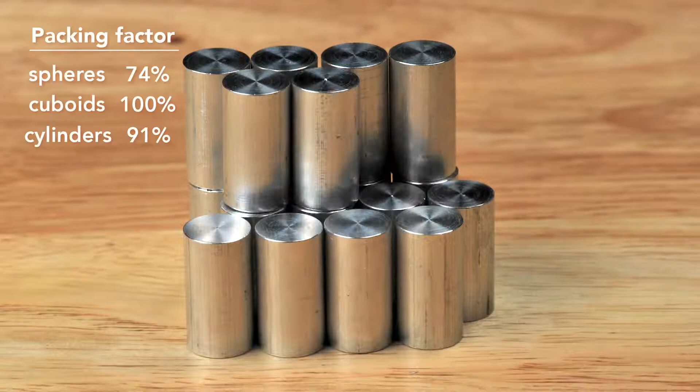So, to create a can, engineers use a cylinder, which has elements of both shapes. From the top, it's like a sphere, and from the side, it's like a cuboid. A cylinder has a maximum packing factor of about 91%, not as good as the cuboid, but better than the sphere. Most important of all, the cylinder can be rapidly manufactured.

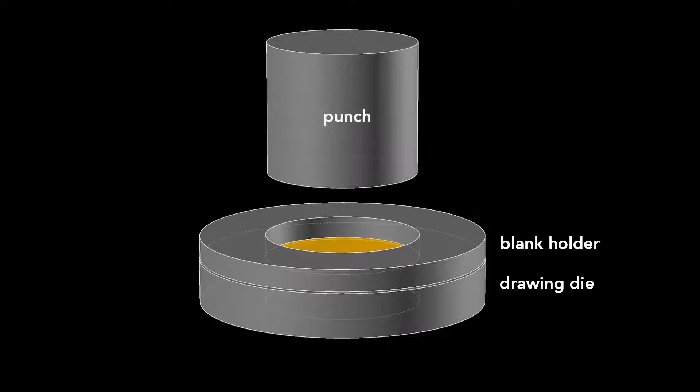The can begins as this disc called a blank, punched from an aluminum sheet about 3/10 of a millimeter thick. The first step starts with a drawing die, on which sits the blank and then a blank holder that rests on top. We'll look at a slice of the die so we can see what's happening. A cylindrical punch presses down on the die, forming the blank into a cup. This process is called drawing.

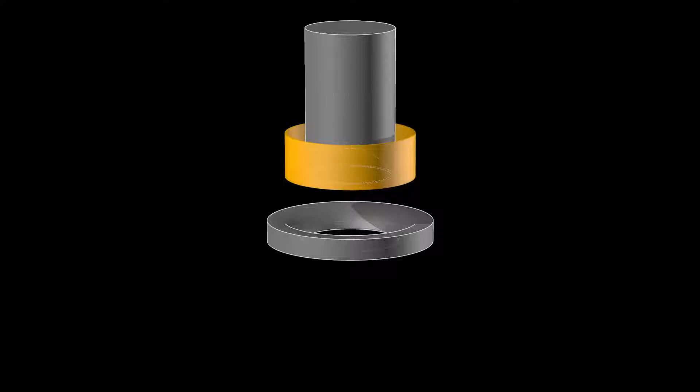This cup is about 88 millimeters in diameter, larger than the final can, so it's redrawn. That process starts with this wide cup and uses another cylindrical punch and a redrawing die. The punch presses the cup through the redrawing die and transforms it into a cup with a narrower diameter, which is a bit taller. This redrawn cup is now the final diameter of the can, 65 millimeters, but it's not

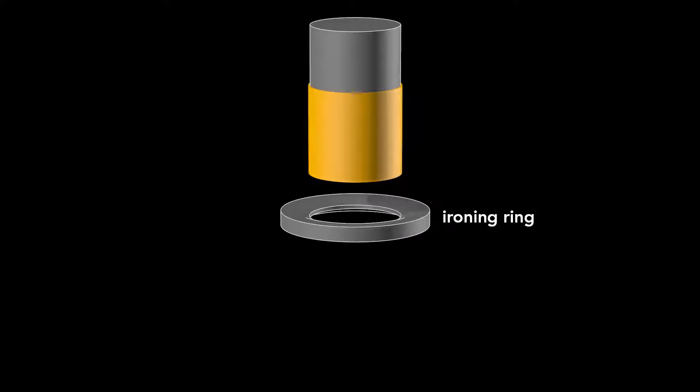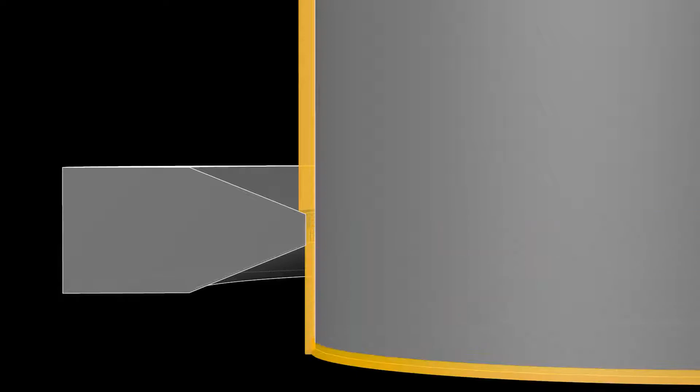yet tall enough. A punch pushes this redrawn cup through an ironing ring. The cup stays the same diameter as it becomes taller and the walls thinner. If we watch this process again up close, you see the initial thick wall and then the thinner wall after it's ironed. Ironing occurs in 3 stages, each progressively making the walls thinner and the can taller.

After the cup is ironed, the dome on the bottom is formed. This requires a convex doming tool and a punch with a matching concave indentation. As the punch presses the cup downward into the doming tool, the cup bottom then deforms into a dome. That dome reduces the amount of metal needed to manufacture the can. The dome bottom uses less material than if the bottom were flat.

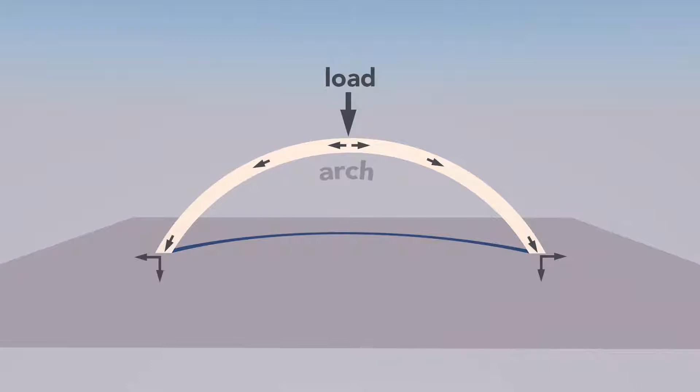A dome is an arch revolved around its center. The curvature of the arch distributes some of the vertical load into horizontal forces, allowing a dome to withstand greater pressure than a flat beam.

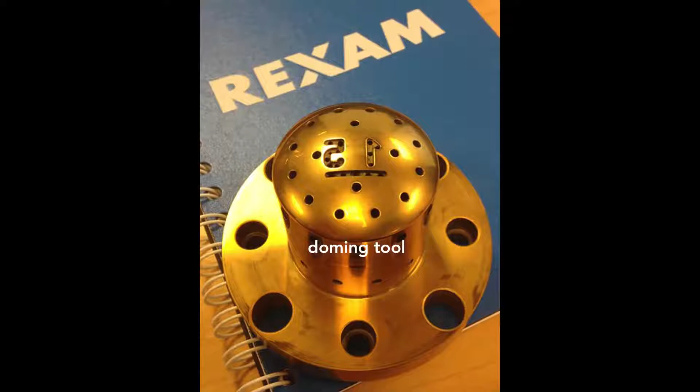On the dome, you might notice 2 large numbers. These debossed numbers are engraved on the doming tool. The first number signifies the production line in the factory, and the second number signifies the body maker number. The body maker is the machine that performs the redrawing, ironing, and doming processes. These numbers help troubleshoot production problems in the factory. In that factory, the manufacturing of a can takes place at a tremendous rate.

These last 3 steps, redrawing, ironing, and doming, all happen in one continuous stroke and in only 1/7 of a second. The punch moves at a maximum velocity of 11 meters per second and experiences a maximum acceleration of 45 Gs. This process runs continuously for 6 months or around 100 million cycles before the machine needs servicing.

Now, if you look closely at the top of the can body, you see that the edges are wavy and uneven. These irregularities occur during the forming. To get a nice, even edge, about 6 millimeters is trimmed off of the top. With an even top, the can can now be sealed.

But before that sealing occurs, a colorful design is printed on the outside. The term of art in the industry is decoration. The inside also gets a treatment. A spray-coated epoxy lacquer separates the can's contents from its aluminum walls. This prevents the drink from acquiring a metallic taste and also keeps acids in the beverage from dissolving the aluminum.

The next step forms the can's neck, the part of the can body that tapers inward. This necking requires 11 stages. The forming starts with a straight-walled can. The top is brought slightly inward, and then this is repeated further up the can wall until the final diameter is reached. The change in neck size at each stage is so subtle that you can barely tell a difference between one stage and the next.

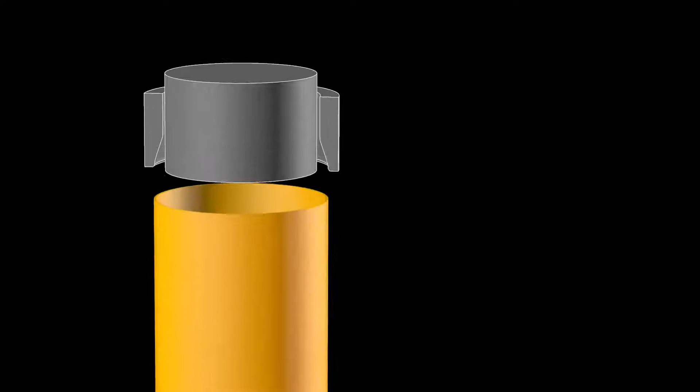Each one of these stages works by inserting an inner die into the can body, then pushing an outer die, called the necking sleeve, around the outside. The necking sleeve retracts, the inner die retracts, and the can moves to the next stage. The necking is drawn out over many different stages to prevent wrinkling or pleating of the thin aluminum.

Since the 1960s, the diameter of the can end has become smaller by 6 millimeters, from 60 millimeters to 54 millimeters today. This seems a tiny amount, but the aluminum can industry produces over 100 billion cans a year, so that 6 millimeter reduction saves at least 90 million kilograms of aluminum annually. That amount would form a solid cube of aluminum 32 meters on a side. Compare that to a 787 Dreamliner with a 60-meter wingspan.

Now, after the neck has been formed, the top is flanged. That is, it flares out slightly and allows the end to be secured to the body, which brings us to the next brilliant design feature, the double seam. On older steel cans, manufacturers welded or soldered on the ends. This often contaminated the can's contents. In contrast, today's cans use a hygienic double seam, which can also be made faster.

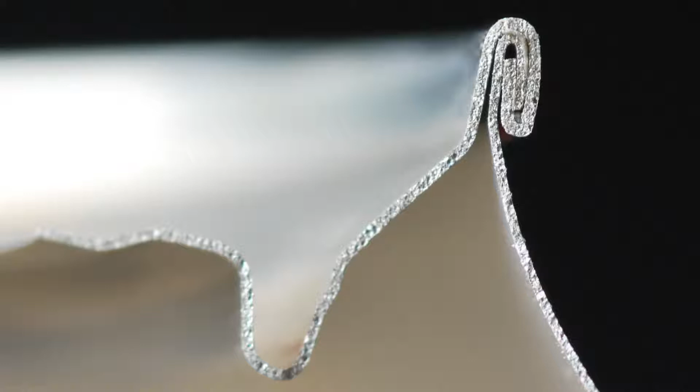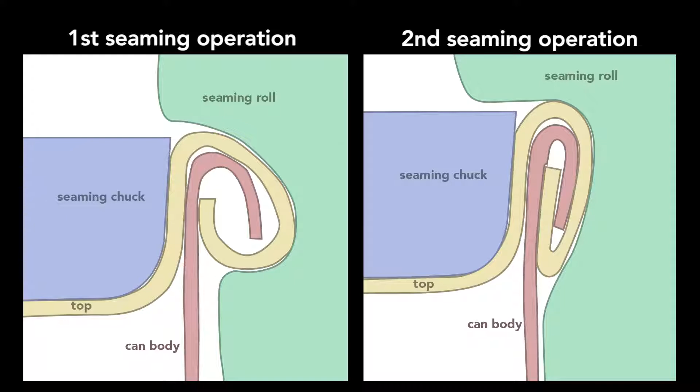This can is cut in half so you can see the cross-section of the double seam. To create this seam, a machine uses two basic operations. The first curls the end of the can cover around the flange of the can body. The second operation presses the folds of the metal together to form an airtight seal. While the operations themselves are simple, they require high precision. Parts misaligned by a small fraction of a millimeter cause the seam to fail.

In addition to the clamping of the end and can body, a sealing compound ensures that no gas escapes through the double seam. The compound is applied as a liquid, then hardens to form a gasket. The end, attached immediately after the can is filled, traps gases inside the can to create pressures of about 30 psi or 2 times atmospheric pressure. In soda, carbon dioxide produces the pressure. In non-carbonated drinks like juices, nitrogen is added.

So why is a beverage can pressurized? Because the internal pressure creates a strong can despite its thin walls. Squeeze a closed, pressurized can, it barely gives. Then, squeeze an empty can. It flexes easily, the can walls are thin, only 75 microns thick, and they're flimsy. But the internal pressure of a sealed can pushes outwards equally and so keeps the wall in tension.

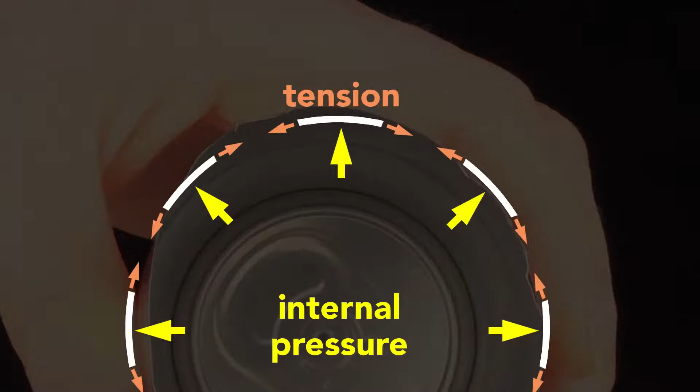This tension is key. The thin wall acts like a chain. In compression, it has no strength, but in tension, it's very strong. The internal pressure strengthens the cans so that they can be safely stacked. A pressurized can easily supports the weight of an average human adult. It also adds enough strength so that the can doesn't need the corrugations like in this unpressurized steel food can.

While initially pressurized to about 2 atmospheres, a can may experience up to 4 atmospheres of internal pressure in its lifetime due to elevated temperatures, and so the can is designed to withstand up to 6 atmospheres or 90 psi before the dome or the end will buckle.

Why is there a tab on the end of the can? It seems a silly question. How else would you open it? But originally, cans didn't have tabs. Very early steel cans were called flat tops for pretty obvious reasons. You use a special opener to puncture a hole to drink from and a hole to vent.

In the 1960s, the pull tab was invented so that no opener was needed. The tab worked like this. You lift up this ring to vent the can and pull the tab to create the opening. Easy enough, but now you've got this loose tab. The cans ask you to please don't litter, but sadly these pull tabs got tossed on the ground where the sharp edges of the tabs cut the bare feet of beachgoers or they harmed wildlife.

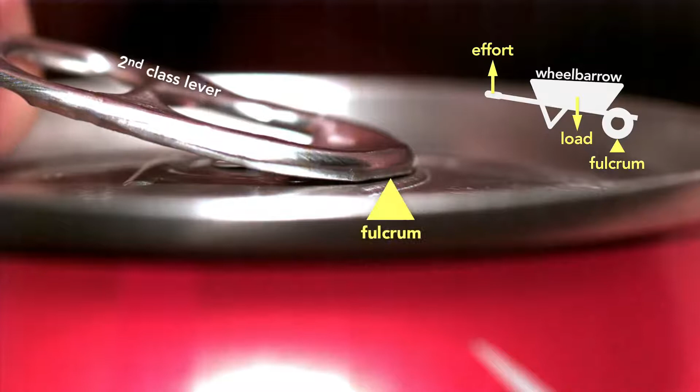So the beverage can industry responded by inventing the modern stay-on tab. This little tab involved clever engineering. The tab starts as a second-class lever. This is like a wheelbarrow because the tip of the tab is the fulcrum and the rivet the load. The effort is being applied on the end.

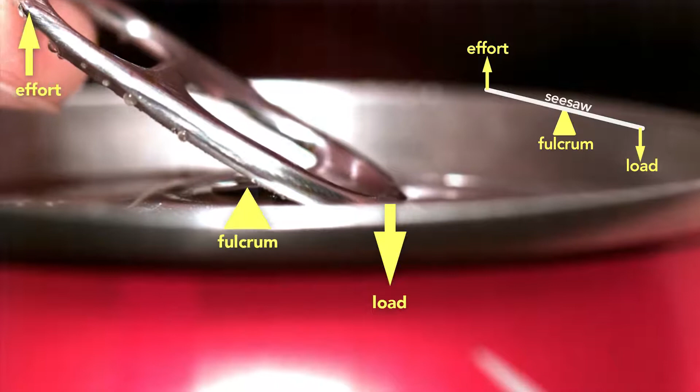But here's the genius part. The moment the can vents, the tab switches to a first-class lever, which is like a seesaw, where the load is now at the tip and the fulcrum is the rivet. You can see clearly how the tab, when working as a wheelbarrow, lifts the rivet.

In fact, part of the reason this clever design works is because the pressure inside the can helps to force the rivet up, which in turn depresses the outer edge of the top until it vents the can, and then the tab changes to a seesaw lever. Looking from the inside of the can, you can see how the tab first opens near the rivet. If you try to simply force the scored metal section into the can using the tab as a first-class lever with the rivet as the fulcrum throughout, you'd be fighting the pressure inside the can. The tab would be enormous and expensive.

The aluminum beverage can is so ubiquitous that it's easy to take for granted. But the next time you take a sip from one, consider the decades of ingenious design required to create this modern engineering marvel. I'm Bill Hammack, the Engineer Guy.